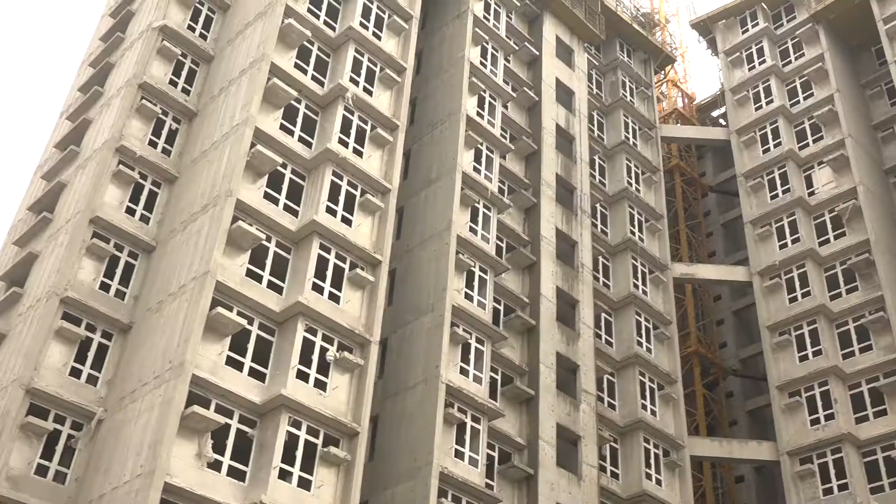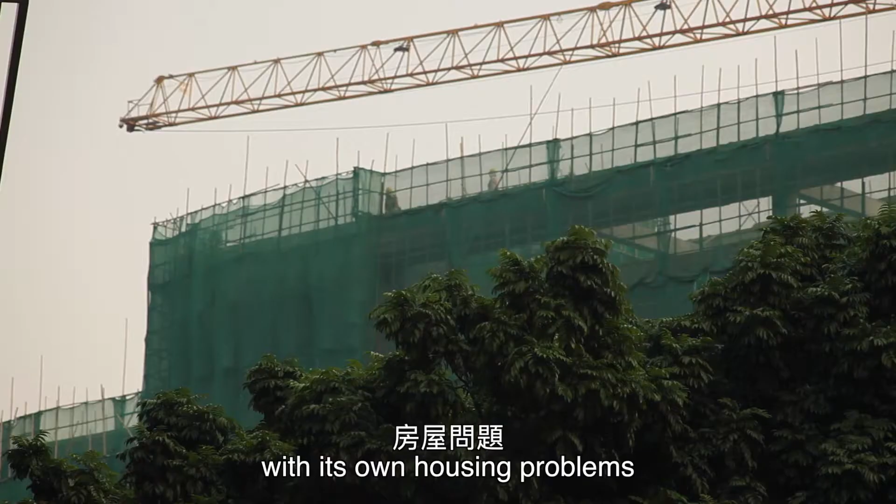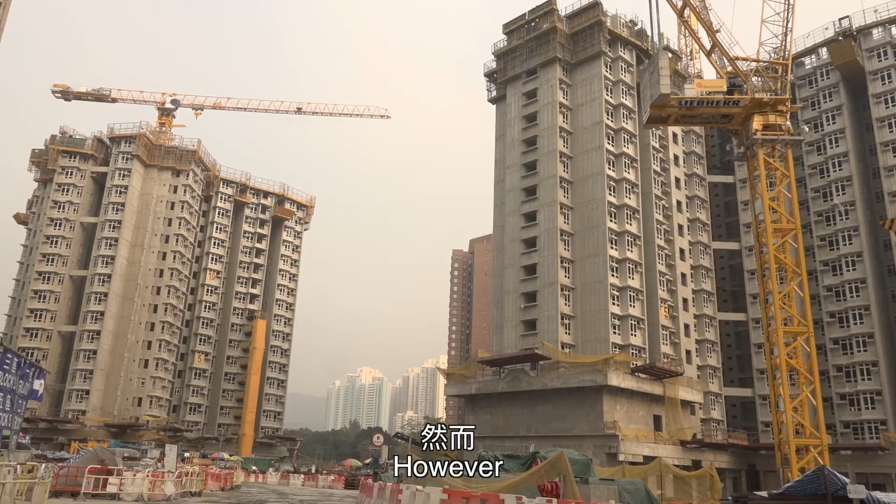Every country in the world is wrestling with its own housing problems, but probably none is comparable to Hong Kong, where housing has enduringly been a major concern to almost everybody over the past decades. The Policy Address 2013 reiterated an ambitious housing plan. However, Hong Kong is suffering from a series of constraints, such as labor shortages, time, safety, and environment protection to deliver the housing plan.

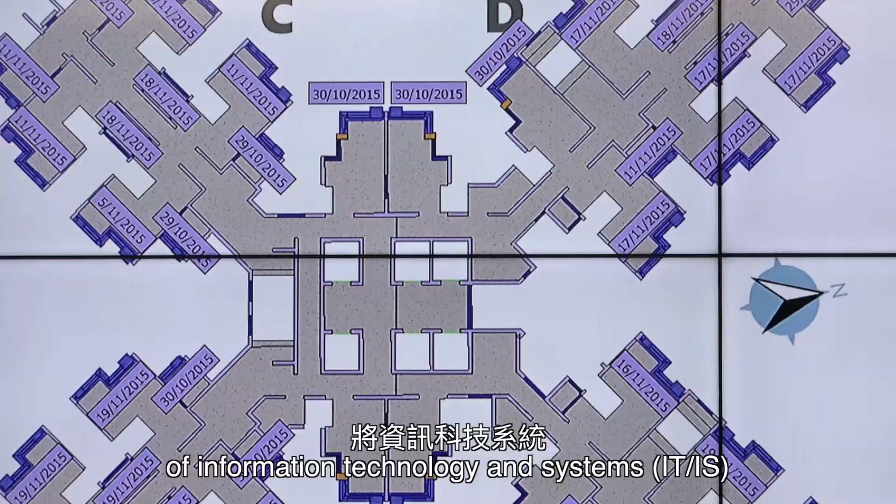Public housing plays an important role in providing residences for the Hong Kong people. Hong Kong Housing Authority, HKHA, has been a sector leader pioneering the development and applications of information technology and systems, ITIS, throughout its construction and housing operations. HKHA has been working with its business partners on the application of BIM and HOMES.

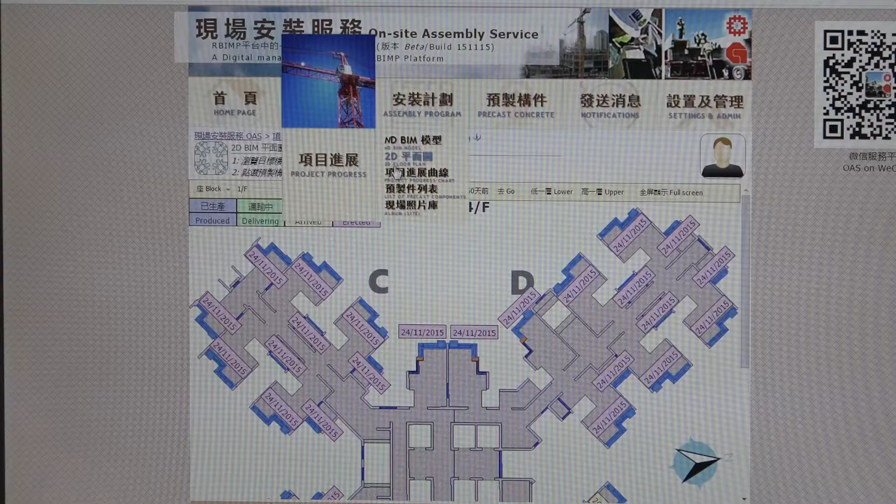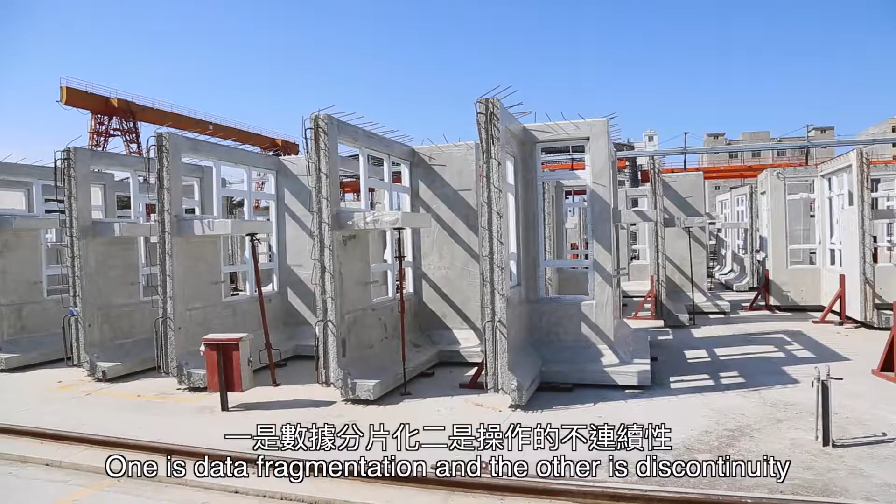BIM contributes a lot to enable better productivity for public housing construction in Hong Kong. We need more data for the Housing Authority to make advanced decision-making based on BIM, and now we are facing two challenges in order to excel. One is data fragmentation, and the other is discontinuity. We have a vision to bridge the gaps between BIM and HOMES. One notable action is to enable real-time visibility and traceability of prefabricated components to facilitate site management.

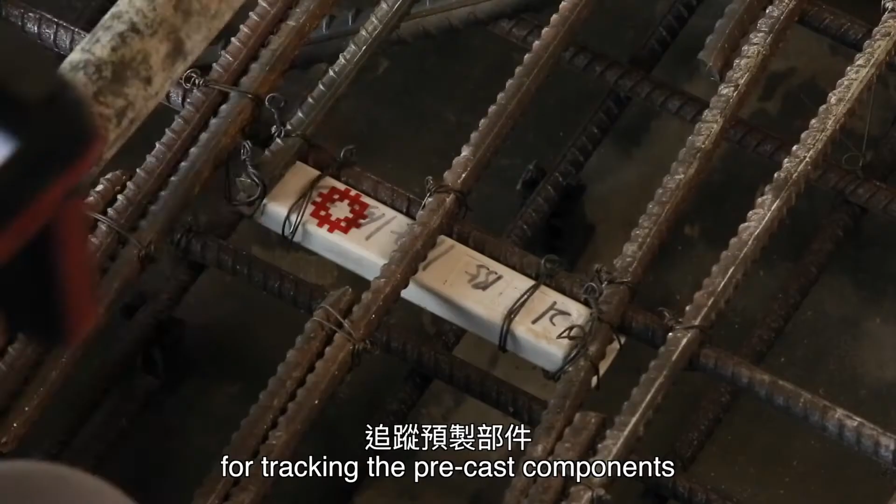In order to tackle these challenges, with the help from LSCM R&D Center, the RFID-Enabled Building Information Modeling (BIM) platform for prefabrication housing production in Hong Kong is carried out by Professor George Huang, Dr. Wilson Lu, Professor Thomas Ng, and Professor Geoffrey Shen from the University of Hong Kong and the Hong Kong Polytechnic University.

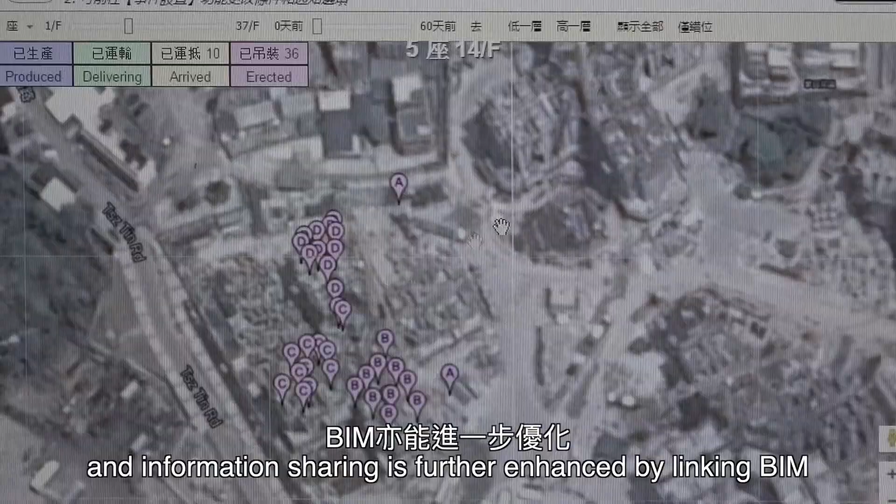The solution uses RFID for tracking precast components from prefabrication production and transportation logistics to delivery at the construction site and installation of the prefabrication components, where the tracking data is used for life cycle management of the project. The geospatial data collected is fed into the BIM system, and information sharing is further enhanced by linking BIM with the Hong Kong Housing Authority's own Housing Construction Management Enterprise System, or HOMES, for more efficient and effective project management.

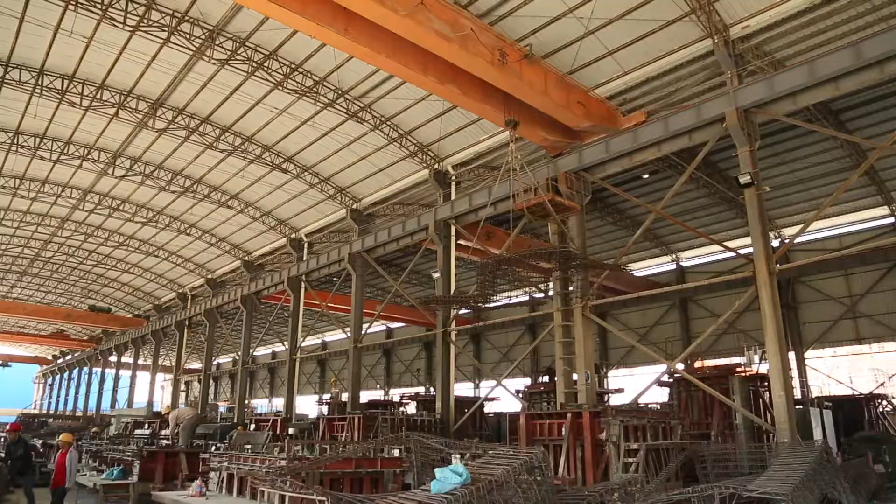Three innovative technologies were employed in the solution. First, a scheme for converting typical construction objects into smart construction objects using IoT and cloud technology was introduced, along with an innovative RFID-enabled gateway designed and developed for managing the SCOs.

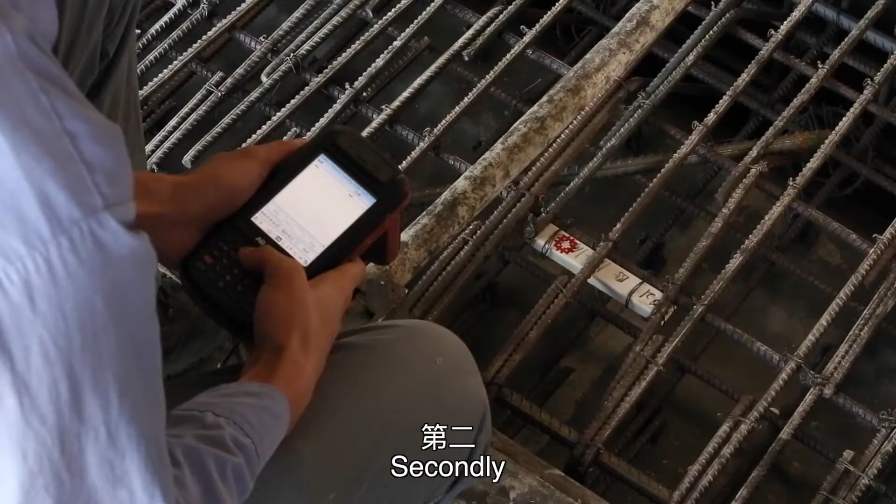Secondly, an RFID-enabled BIM platform employing IoT and cloud techniques for designing the architecture and a suite of services and tools was developed. Finally, the 3D design and modeling in BIM was expanded to a multi-dimensional application by making full use of the collected real-time data.

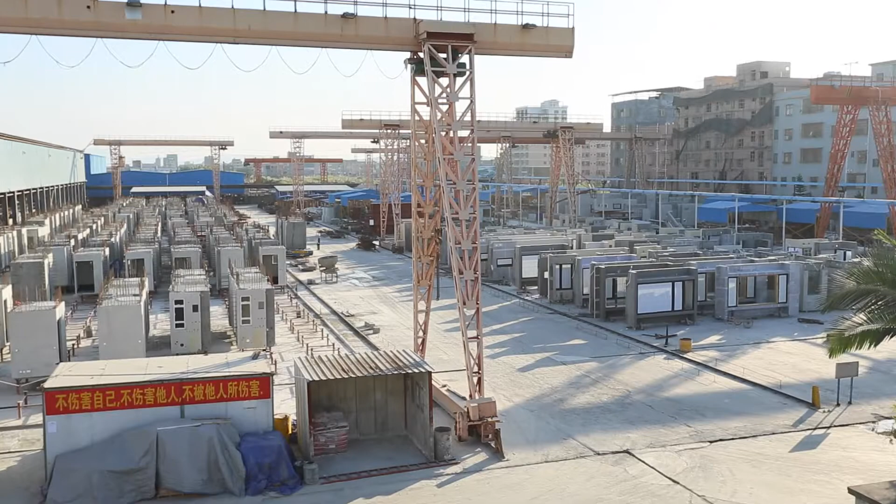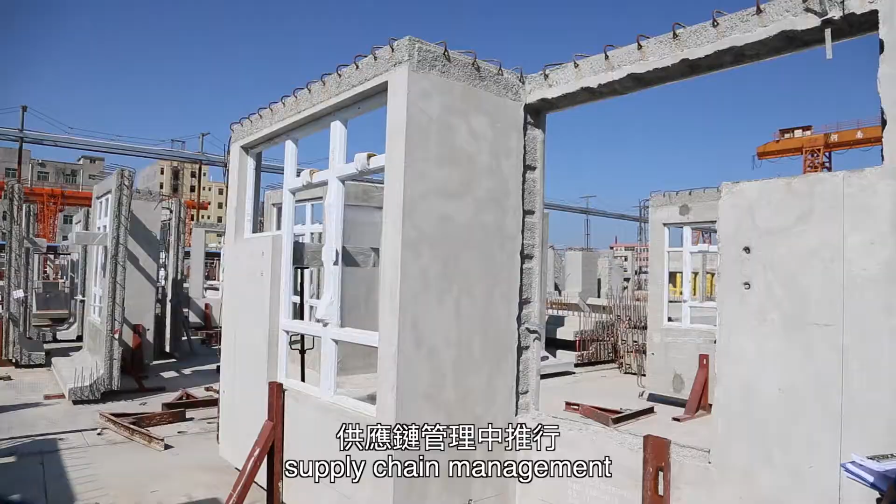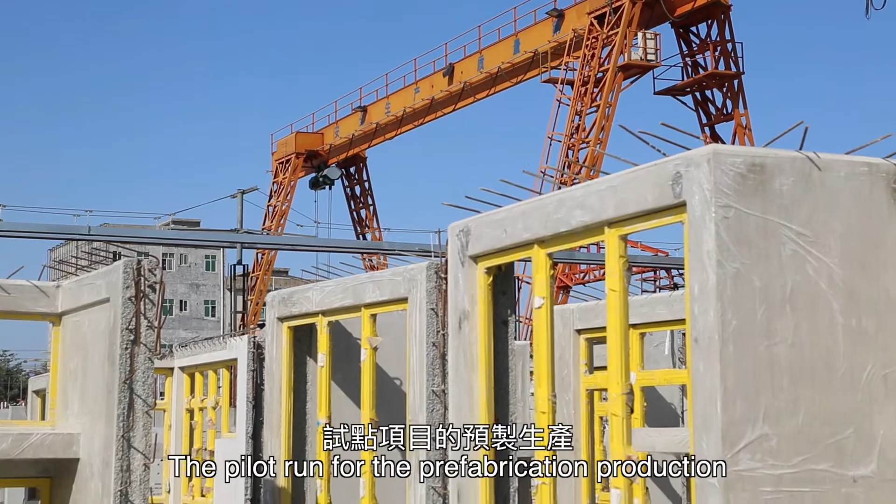Three pilot projects were conducted in the prefabrication construction supply chain management: Wing Hong Sun for prefabrication production, Ying Yun for logistics, and Tuen Mun site for assembly. The pilot run for the prefabrication production was conducted at the facility of Wing Hong Sun Enterprises Limited, the manufacturer for the public housing project.

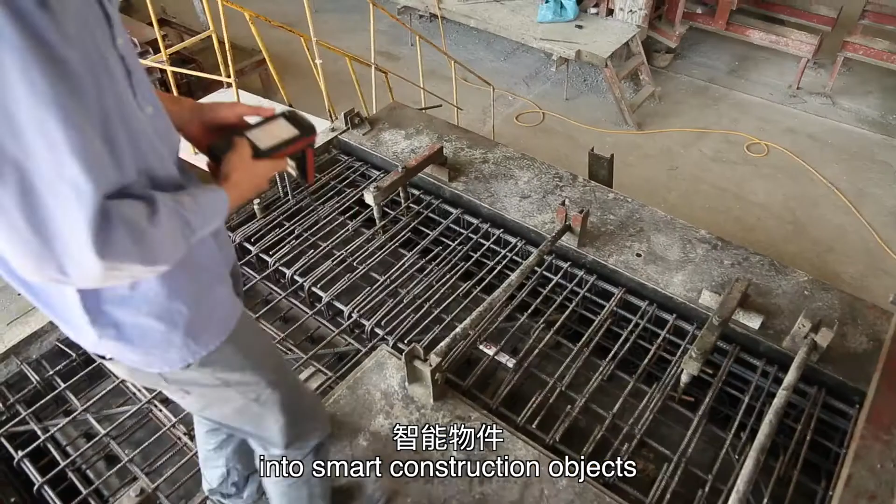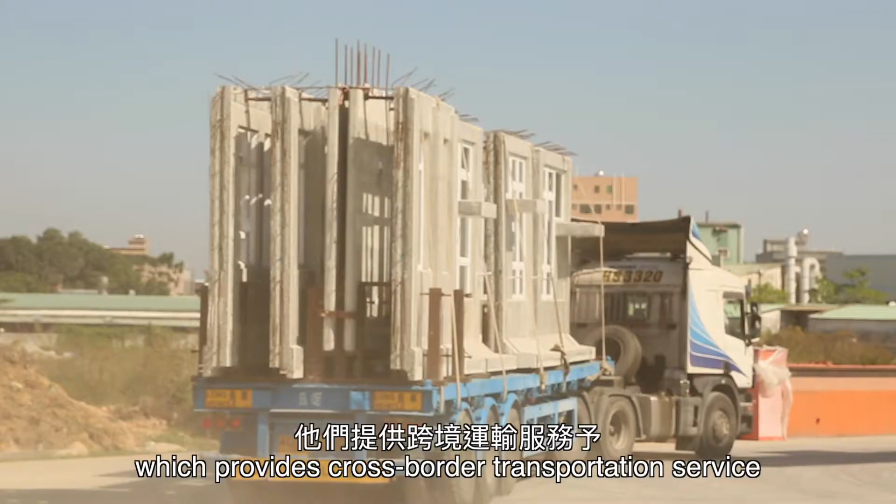Yingyuan Transportation Limited is one of the major transportation providers in this project, which provides cross-border transportation service for precast components from Wing Hong Sun Limited. Relevant stakeholders from WHS, Gammon, and HA can monitor the statuses of transportation orders and transportation tasks through the web-based system of PTS in real time.

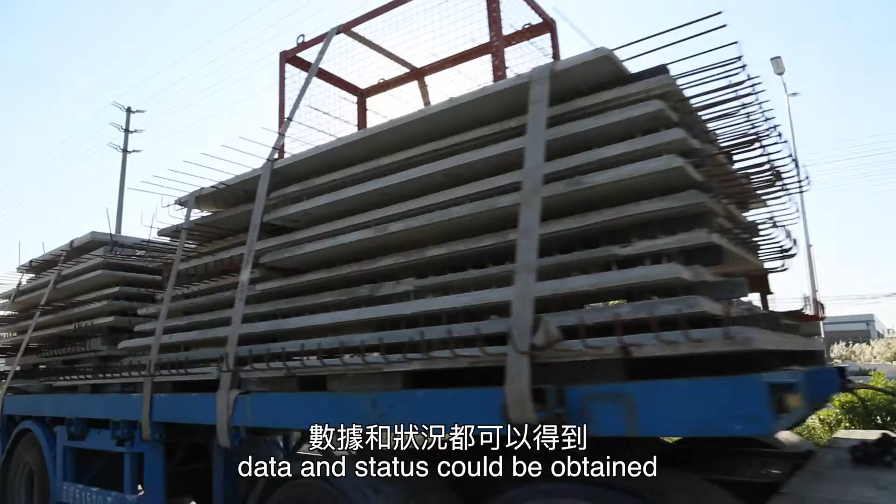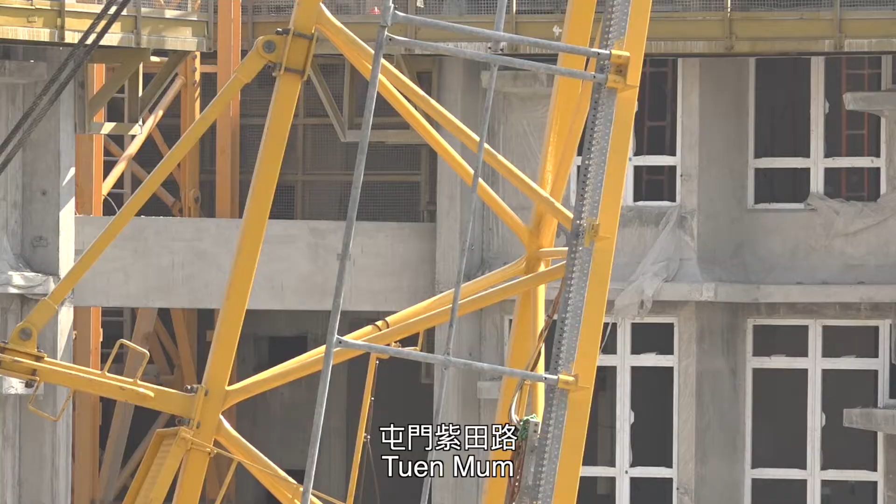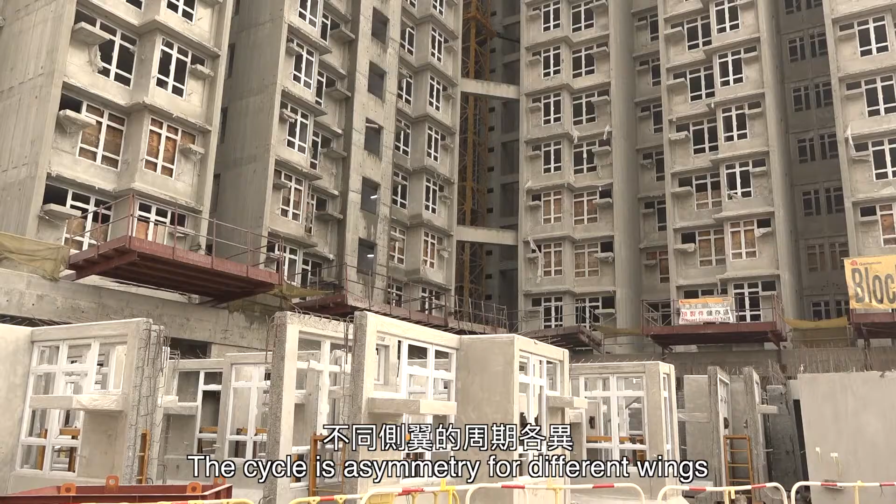The site A54 is located at Tsz Tin Road, Tuen Mun, near Siu Hong station on the West Rail line. There are 5 residential buildings and 1 commercial center under construction now. The schedule of each residential block is based on a 6-day cycle. The cycle is asymmetric for different wings to utilize the tower crane located in the center of the block.

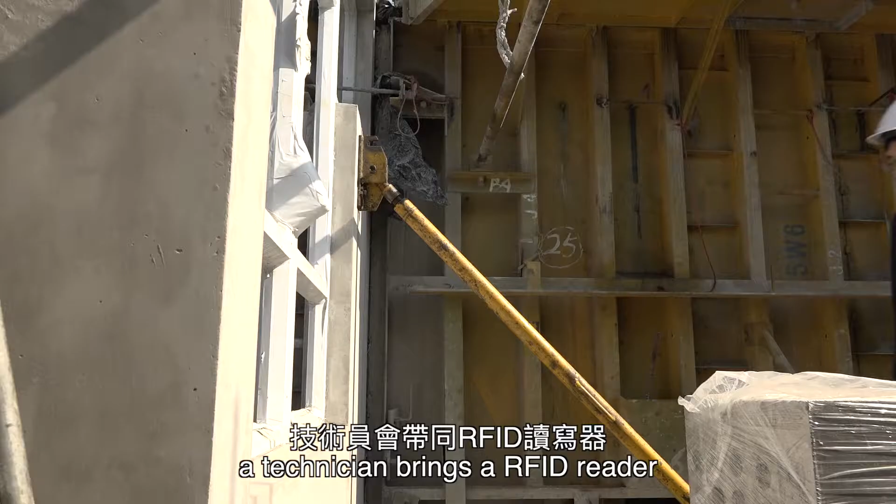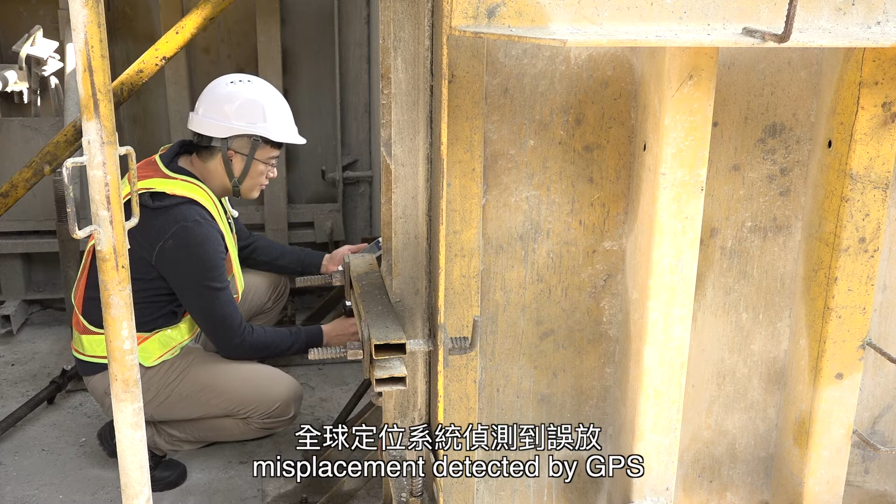When the targeted components, facades in this project, are erected, a technician brings an RFID reader and an app on smartphone to confirm the erections. The data will be uploaded to the system in real time. If there's any error, for example, misplacement detected by GPS, the system will alert as soon as possible. For example, if a facade is erected in a wrong place, a quick alert will save a lot from reworks and keep the quality of the structure.

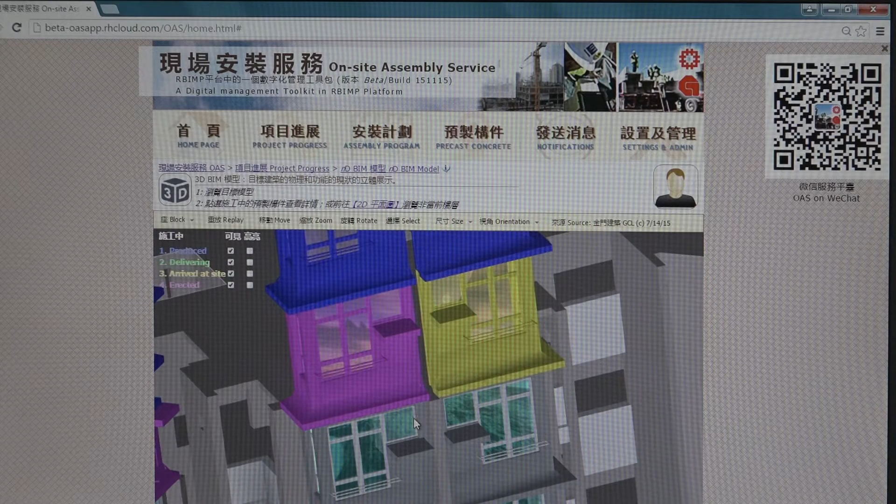The project integrates RFID technology with BIM technology to innovate a platform, which is the ultimate technology this project is going to deliver. We developed a web system and a smartphone app to collect the product information such as production time, production line, quality check, loading time, and other information. The information can be synchronized in a BIM-based platform and will be used in later stages, such as transportation and site installation.

In this ITF project, we try to put the information of the components in the RFID tag and integrate it with the BIM model for track and trace purpose. The project manager can visualize the real-time construction process through the BIM model.

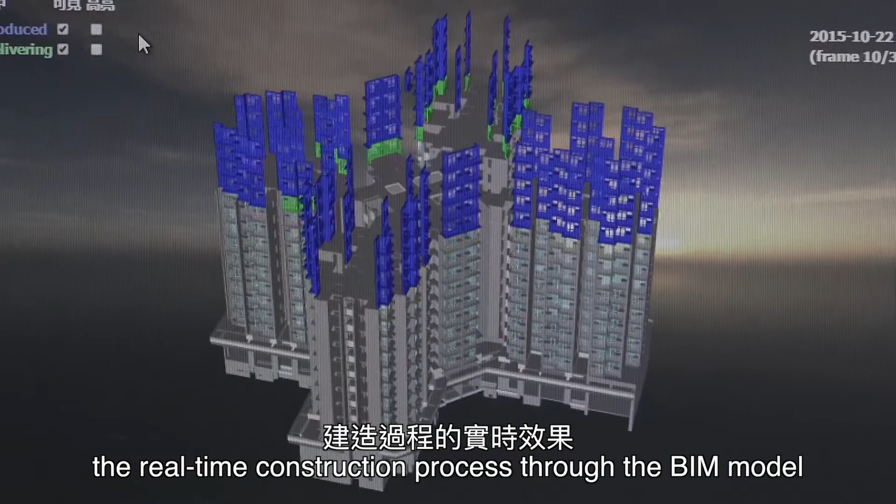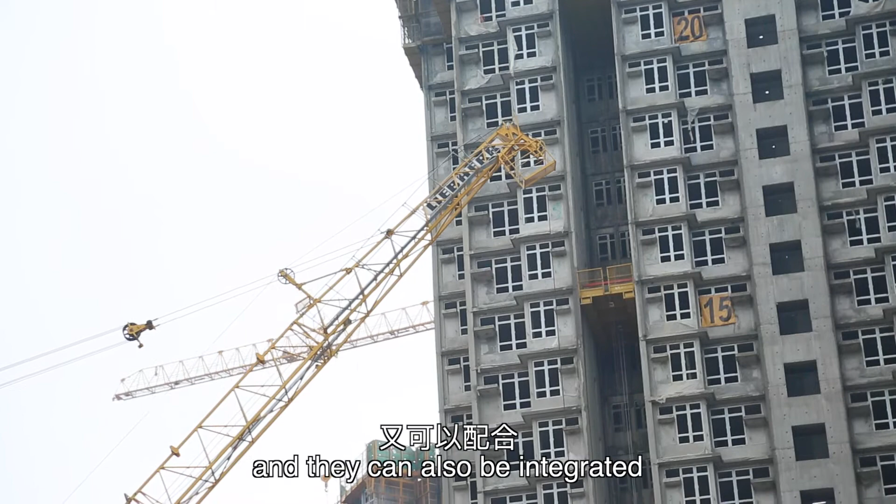We are very pleased to have the opportunity to work with several professors in the University of Hong Kong on this exciting project, which explores the use of a group of technologies to see how they can be integrated to improve the efficiency and the effectiveness of prefabricated construction projects. And they can also be integrated with the existing system they use.

Thanks to the Innovation and Technology Fund, LSCM R&D Center and our project team, we are now able to track and trace the real-time construction progress through an n-dimensional BIM approach, which can reflect the real-time situations of prefabrication production, logistics, and on-site construction.

I believe that with our concerted efforts on making our building industry greener, safer, and with better productivity, the future of Hong Kong's building industry will be one of the sparkling stars in the world. I'd like to thank all the project team members for the hard work and seamless collaboration.